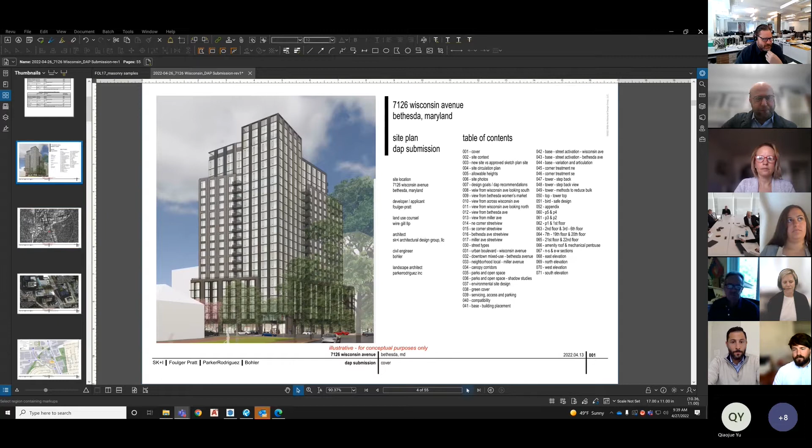Hi, I'm Andy Chakowski with SK&I Architects. As Judd said, we've been working on this for quite a while now, working through all the details as we've moved forward. Just to recap for those who may not know exactly where this is: we're on the south side of Bethesda, about 5 blocks south of the Metro Center, 2 blocks south of the new Purple Line station at the corner of Bethesda and Wisconsin, directly across from the Farm Women's Market.

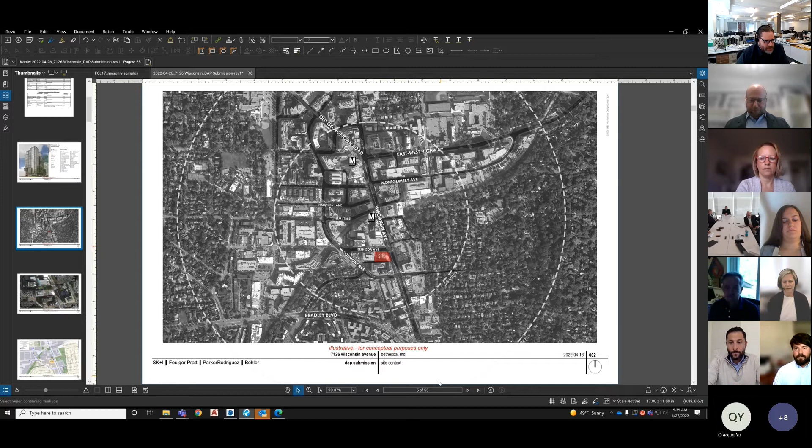As Heather said, this originally came in as a sketch plan and has an approved sketch plan for the eastern piece. We've now added the Capital One site and consolidated the site into a combined lot. This property line is important, as it extends up through the building and separates the heights. This is zoned to be 225 feet on the eastern portion, and it steps down to 200 feet on the western side of the building, and that broadcasts up through the massing.

I do want to point out, we submitted this two weeks ago to you all, and we just realized this sheet had a little error for those in the community—we had the older version of the Farm Women's Market. It's been updated since, and we've added that to the submission, so when it gets posted online, if any community members see that, this has the current site plan.

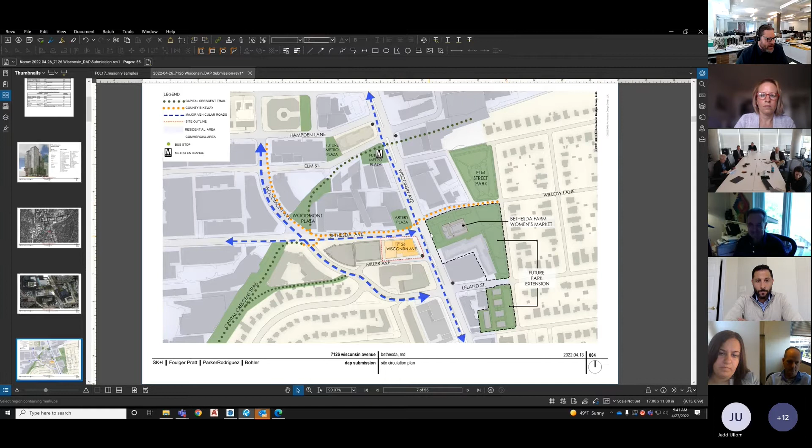This is just a circulation plan illustrating the major roads and the new bike routes. We know there's a bike lane that's been built on Bethesda Avenue, crossing Artery Plaza and extending across Wisconsin to the east, fully understanding the importance of this site and its place in Bethesda on Wisconsin.

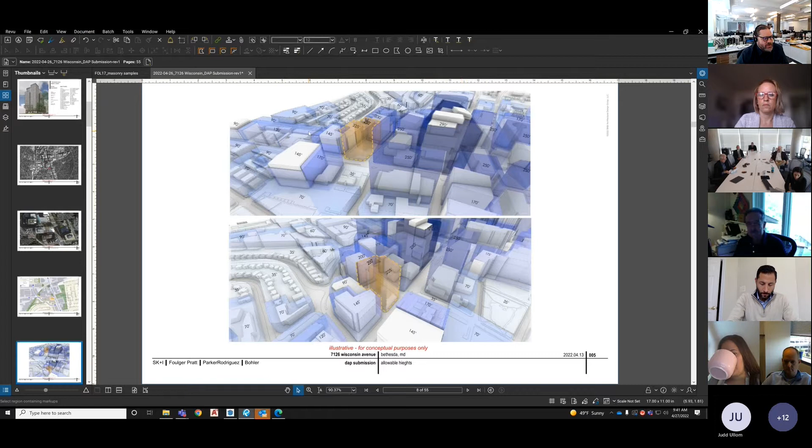Going back to the overall heights, the massing of the Bethesda plan tapers from the edges to the center, and we're one of the larger jumps in height—from 145 to 225, going up to the 290 of the Elm at the Purple Line station. Here are a couple of views showing that density terracing up, if you will.

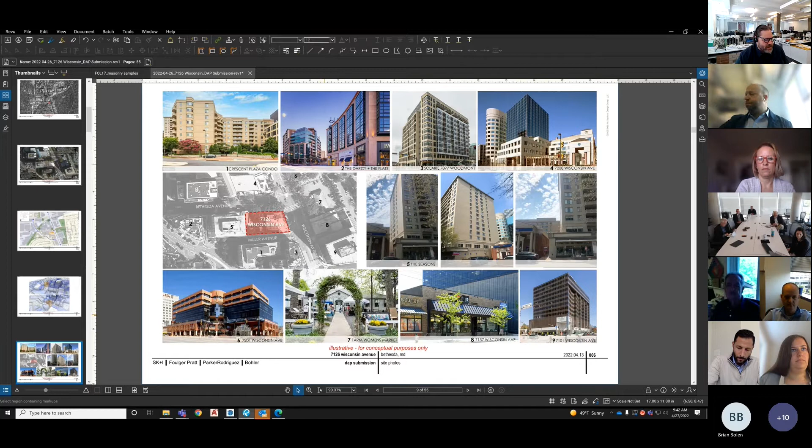Just a couple quick images of the neighborhood. There's a lot of existing condos, newer buildings built in the last decade or so. Artery Plaza is directly to the north of us with the brand new plaza and the new Starbucks—we commonly call this the Starbucks site. And of course the Farm Women's Market and the plaza around it to the east of us.

Just kind of recapping what we came in with. When we came in last July to meet with you all, we proposed the design goals of this project. We said this new expanded site now completes the urban block with 3 active frontages on Bethesda, Wisconsin, and Miller. Bethesda and Wisconsin being the primary ones, and Miller being a little bit more of a service road, but it will be vastly improved over its current condition.

We intend to achieve the design goals of the Bethesda plan and provide a dynamic, sustainable, and inclusive signature address at this location. Sculpt a signature residential tower while maintaining an approachable, scaled facade through unique geometry, varying tower heights, modulating and articulating facades, and limiting the facade's apparent mass, particularly due to the height, the 225-foot height. And create active and engaging architectural frontages and streetscapes to enhance the public realm at the ground floor.

These are the key recommendations we took away from our meeting last summer. One of the main ones was that the setbacks on Bethesda and Wisconsin could be enhanced. You all commented that the setbacks on Miller felt right, or they could be reduced to enhance the Bethesda and Wisconsin setbacks. You all recognized this corner tower on Wisconsin and Bethesda as a jamb, an urban doorway that connects Bethesda Row and the retail portions of Bethesda to Wisconsin and the Farm Women's Market.

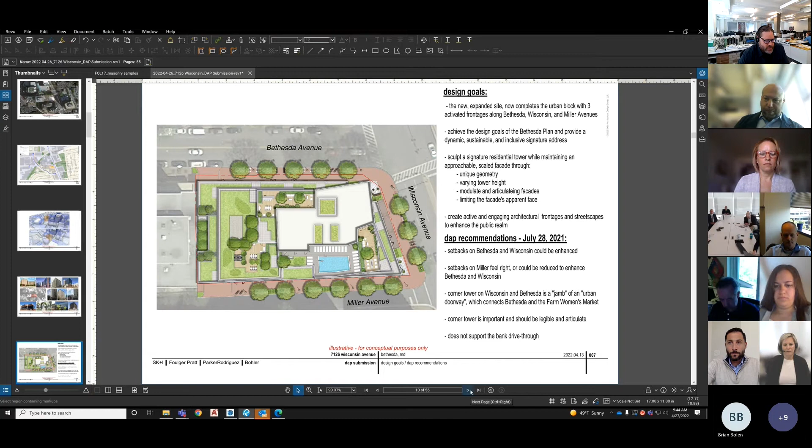One of the issues, I think Paul mentioned this earlier, and we really took it to heart, was the view. The master plan of Bethesda has a wide pedestrian promenade running along here, with the Farm Women's Market on the right side of the image, and the potential development on the left side, with a wide pedestrian promenade.

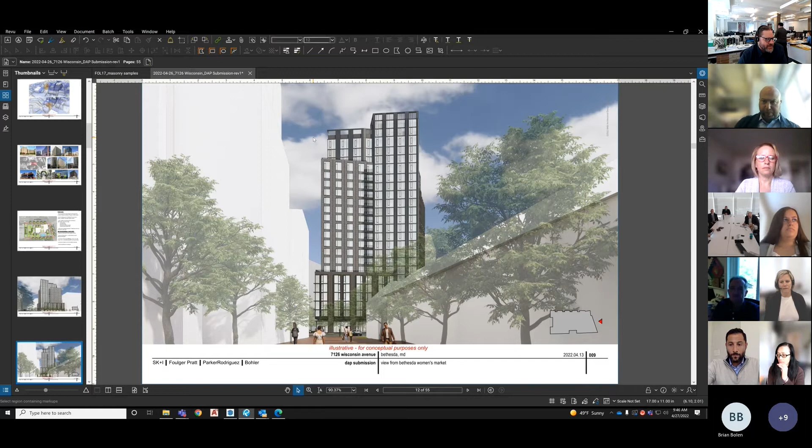We thought that this corner of the building, the secondary corner, was actually quite significant as well as the primary corner, and that this subtle tapering going back could be a quite elegant recess of the building as it splays going up the facade, taking pressure off of the street and fulfilling all the intentions of the Bethesda plan for these setbacks. This exemplifies that and creates a dynamic and interesting secondary corner to the property, which is on axis with that new pedestrian promenade.

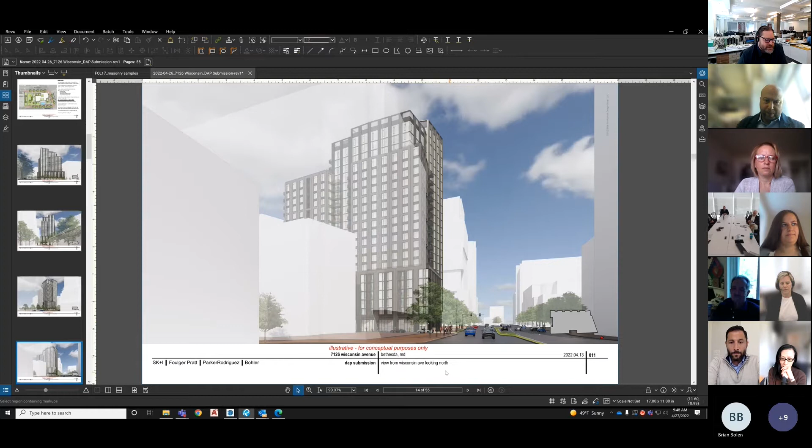This is another view looking north. We call this the True Foods building, since it has True Foods on the first floor. Again, you can see the tapering of the corner and the emphasis of the corner tower. But I think this building, with its placement on the block, the activation of the ground floor, and the tapering, its view, at least specifically from the south, is rather minimal, given the size and scale of the buildings going up along Wisconsin Avenue.

This is a view with the building on Artery Plaza removed, coming from Bethesda Row, near JBG's headquarters. You can see the activation of the base. We have our garage entrance here at the in-corner, and then the retail pieces stepping up the hill towards Wisconsin. The significance here is really that tapering down of the massing from the penthouse to the 225, to the 200.

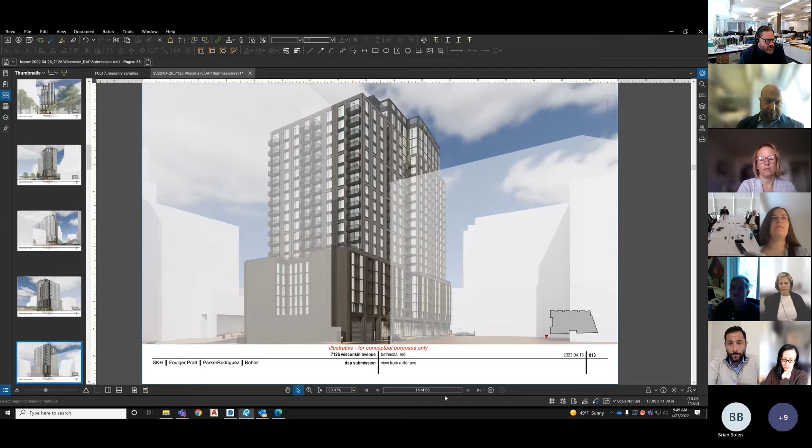This is another view on the south side, on Miller. You'll see this building from all sides. Even this may be the least significant view, but it's also visible specifically from Lot 31, the bike trail that connects to the Capital Crescent Trail. This is where we're proposing our loading, and we're also proposing a bike room on the back of the ground floor amenities, with quick access to the Capital Crescent Trail.

Moving back to Wisconsin, these are close-up views of the corner. We've extended this to be a two-story volume on the corner of Wisconsin and Bethesda. You see the retail storefronts going down Wisconsin and down Bethesda Avenue, with the corner tower coming down. We've treated this corner tower with articulated fins that extend all the way up to the top of the building, specifically at this corner. We're proposing a rich, dark, iron spot brick for the base of the building, punctuated with bays and balconies in metal frames that wrap and surround the window frames, creating a layering effect on the facade.

This is again the south corner, showing the lobby entrance, the main entrance to the residential building. We've preserved the Bethesda and Wisconsin corner for retail, and shifted the lobby to this corner, which still gives it a Wisconsin Avenue address. The Miller side of the facade on the ground floor will be the lobby, amenity, and leasing areas, and further back towards the loading dock we'll have the bike room, dressed up in a special way to make it feel special and quasi-public.

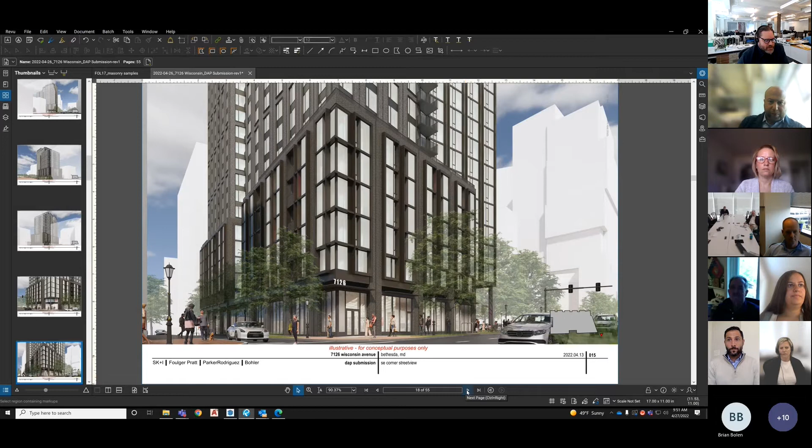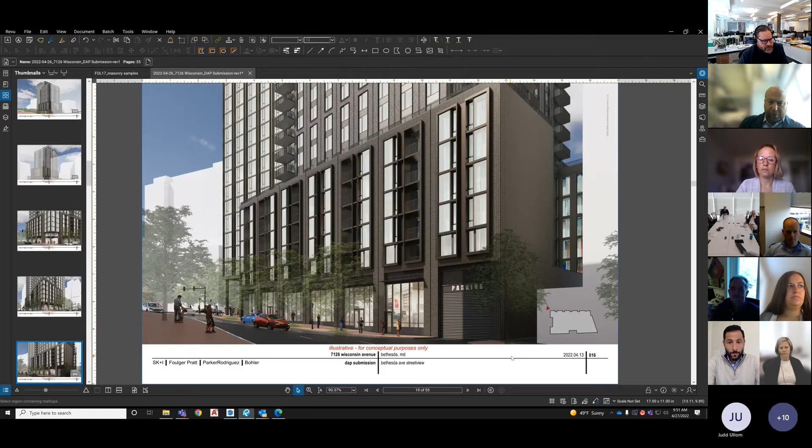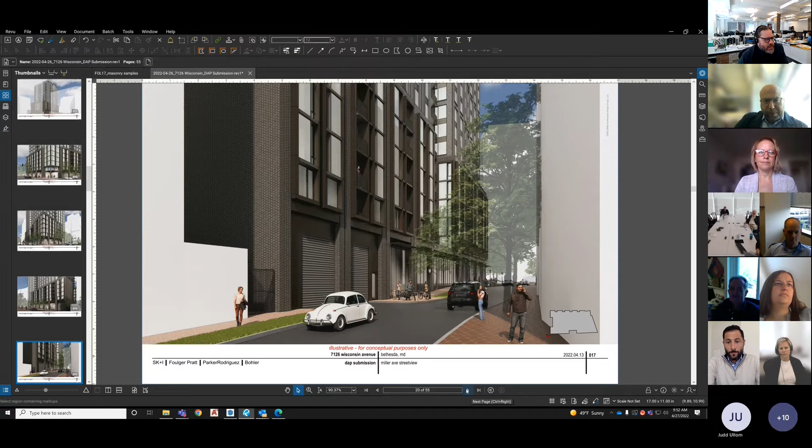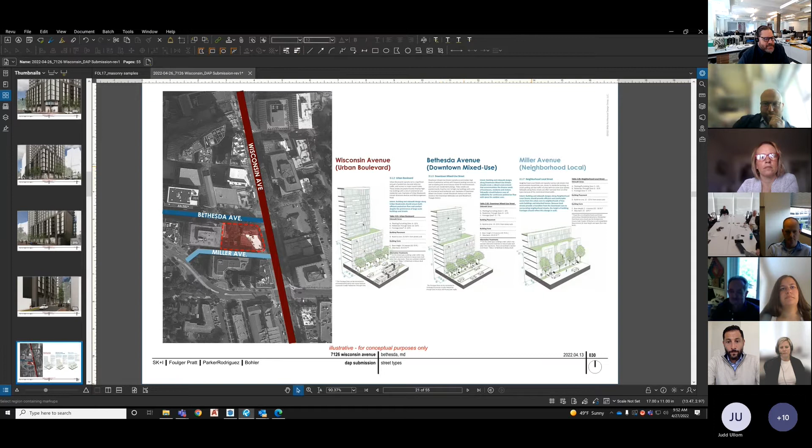We put a lot of diagrams into this to make it abundantly clear that we understand the Bethesda plan and the design guidelines, and that these all influence the building design in impactful ways. Having three frontages, each one of these streets has a different street type in the design guidelines: Wisconsin, the Urban Boulevard; Bethesda, Downtown Mixed Use; and Miller, the Neighborhood Local. Each has different impacts on the facade, the setbacks, and the streetscape.

So we'll start with Wisconsin. We obviously understand the building frontage, and going up through the terracing — this relates to a specific comment from the previous DAP last year, where you all said that the setbacks on Wisconsin and Bethesda were timid and could be enhanced. I think this is where we really took it. We knew Wisconsin was the primary facade, and we enhanced this one as best as we could, starting with a 10-foot setback after the podium.

We went up to a 13-foot setback at the top, and we really pushed this back to about 21 and a half feet at the corner here. So we've really splayed this as it goes up and tapered it back for all the reasons that we talked about.

But I think it really makes a dynamic and interesting secondary corner for this property, as well as meeting and enhancing the intentions of the setback guidelines. On Bethesda, we ultimately get to the 10-foot, but we start at the corner, we taper back to 10 feet. The notch is 10 feet up. The top is 10 feet. But, how do I put it? We can talk about this in the discussion.

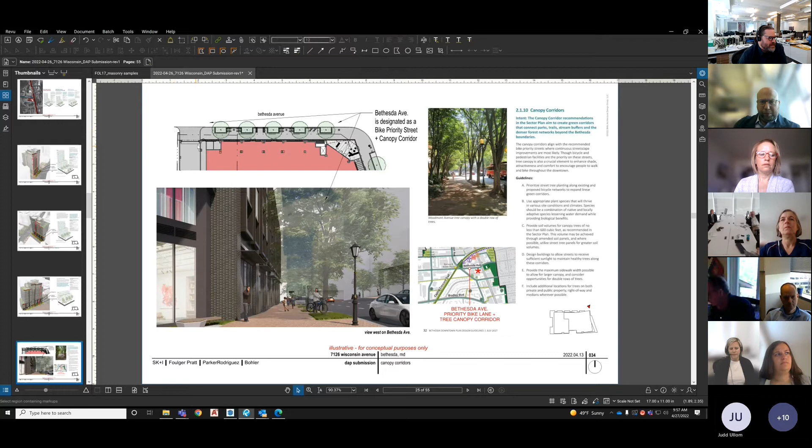A few more diagrams, just reading through the Bethesda guidelines. We understand the importance of the Canopy Corridors. Bethesda Avenue is considered a Canopy Corridor, so we'll be rebuilding it. There are some lovely trees there, but the sidewalks are incredibly narrow, and it's a very precarious place to walk right now. So this will be widened significantly, and we'll be replacing it with 5 substantial street trees moving forward, only interrupted by the small 20-foot drive aisle at the western end of the property.

Going back and understanding the context, we preemptively put this in here, just knowing it could become an issue, but understanding the impact and significance of the farm women's market and all the park space that'll be planned and designed around it.

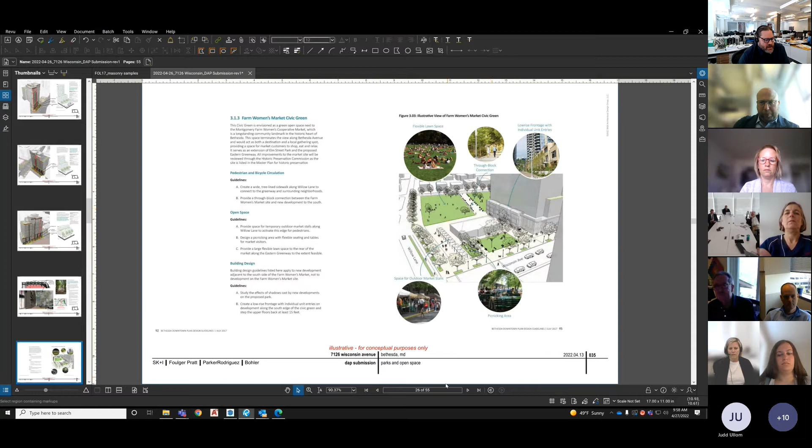We wanted to illustrate the cardinal seasons, the equinoxes and the solstice from spring through fall, showing the impact of the shadow studies and how through the majority of the day, this building will not impact the park at all during the prime use hours from 9 till 3 in the afternoon. I think this was important because we know community members might be concerned about the impact of this building, and it's minimal during these dates.

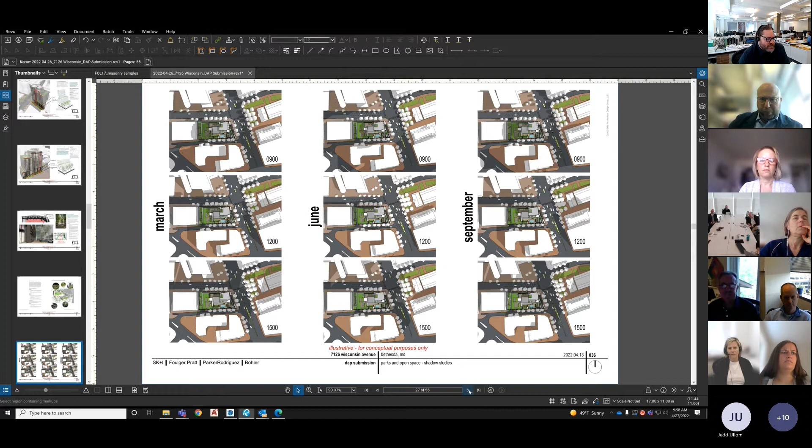Going into the environmental site design of the building, Valerie and Brian worked tremendously hard on meeting this, but we're really pushing the rooftops of these buildings. The rooftops are becoming the most complicated parts of the buildings in some extent, but through designing the vegetated roofs and then the bioretention.

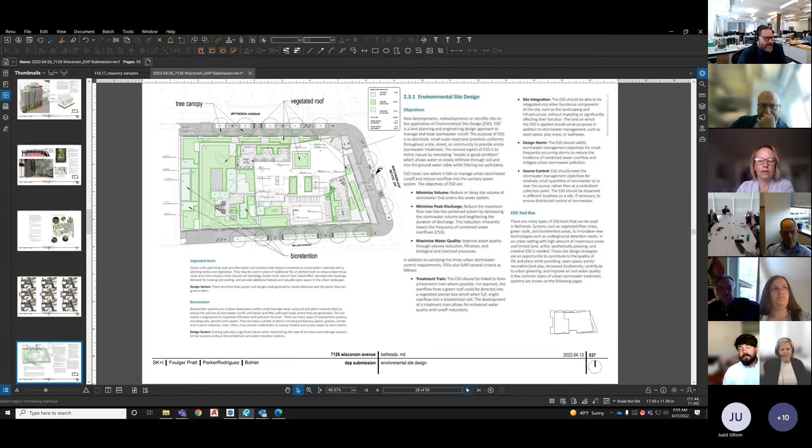This is a diagram that Parker Rodriguez came up with to provide the amount of bioretention, tree canopy, and vegetated roof to not only meet these environmental water retention standards, but also to meet the green coverage of 35%. We'll get into this later, but Brian and Valerie can speak to this in tremendous detail.

Going back to service, access, and parking, this top corner diagram shows what's currently there: a lot of head-in parking, a lot of curb cuts. There are some nice mature trees, but also a lot of unusable, pedestrian-unfriendly paths. We'll be cleaning all that up on Bethesda with only a singular garage entrance, and on Miller, where we're providing a lot of new tree canopy that currently has nothing but head-in parking. We'll provide loading on the back corner, along with the bike room and service areas for residents in that corner. I think the curb cut condition has really been enhanced by this new development.

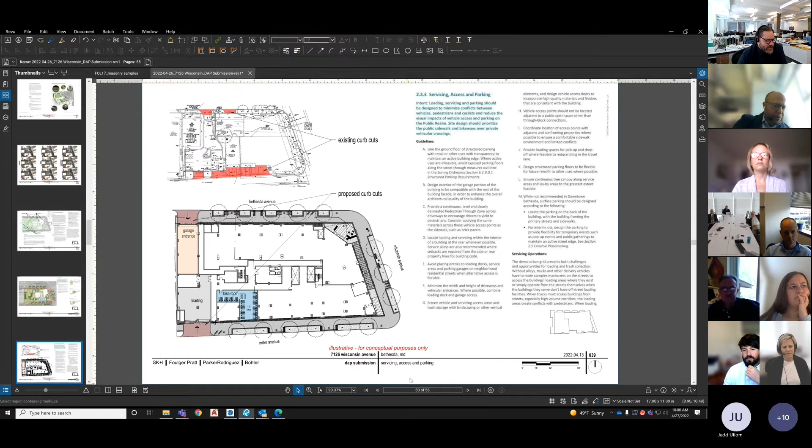Referencing back to compatibility, as I mentioned at the beginning, there's a cascading effect. The base is 6 stories, the body of the building is 19 stories and runs all the way around from Bethesda to Wisconsin and then down Miller. The top of the building is 22 stories, only in the portion I referenced earlier, due to the property lines that impact those height designations between 225 and 220. So it's only this corner bit that's 22 stories, and the corner tower serves as the doorway, the landmark.

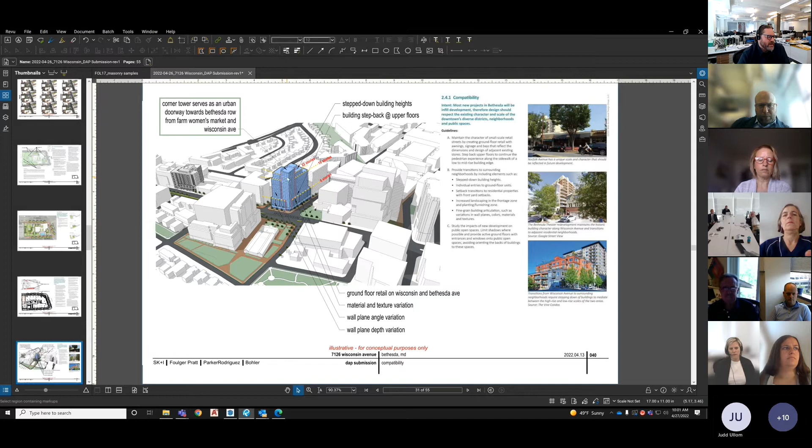We are proposing to put all the mechanical equipment on top of the penthouse, and we'll have the club room in that corner on the top floor, which is allowed, with access to the rooftop pool, et cetera.

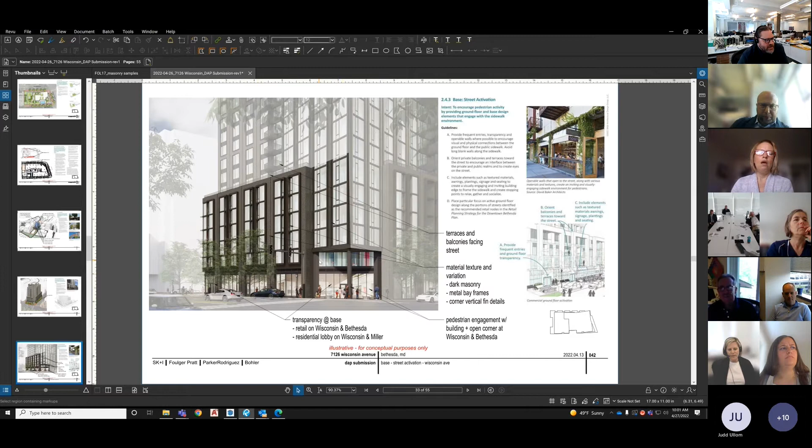A few more things going through the base placement. We followed all the design guidelines to locate and place the building, which provides all this wonderful streetscape. The base street activation is incredibly important, specifically on Wisconsin, with the lobby, ground floor retail, carving the corner, the 2-story corner, and then turning the corner and running down Bethesda Avenue. That's referenced here in this design guideline as a recommended retail node, and this is one of them, so we're complying by providing ground floor retail specifically at those recommended corners and frontages.

Just diagramming the base, variation, and articulation. Going back to these diagrams, you have the corner tower, the 2-story void at the corner, then stepping up to the 6-story. It's not a tremendously long facade at this point, running cleaner along, but then adding those bays, the bay windows and bay projections, the bay frames that hold the balconies within them. Those frames bounce along, creating shadow and visual interest along Bethesda and Wisconsin, as well as Miller, though we didn't diagram that here. And then there's that consistent storefront line.

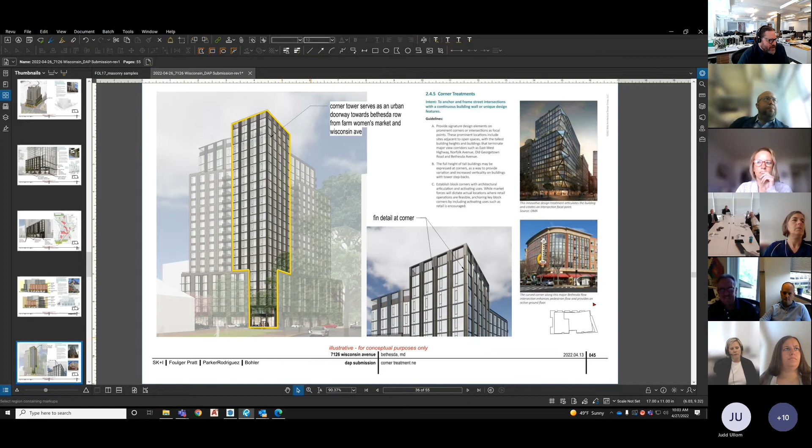Corner treatment, again, thinking of this as the urban hinge, the doorway to Bethesda Row from the Farm Women's Market. The significance of this corner, having it grounded and extending all the way up, then adding detail and articulation to it. We're proposing vertical fins that rise up and attach to the facade to give it an extra layer of detail, an extra layer of shadow play.

The corner treatment, again, that secondary corner discussed earlier, the tapering of that facade along the promenade by the Farm Women's Market. And then the tower setback - we showed this diagram to really illustrate how we're meeting these tower step backs. The minimums recommended are 10 feet on Bethesda, 10 feet on Wisconsin, and 15 feet on Miller. Miller is a little less significant in terms of meeting those, but it does meet that intention through the cumulative setback, the setback averaging if you will, from one property line to the other, providing that significant gap in the middle.

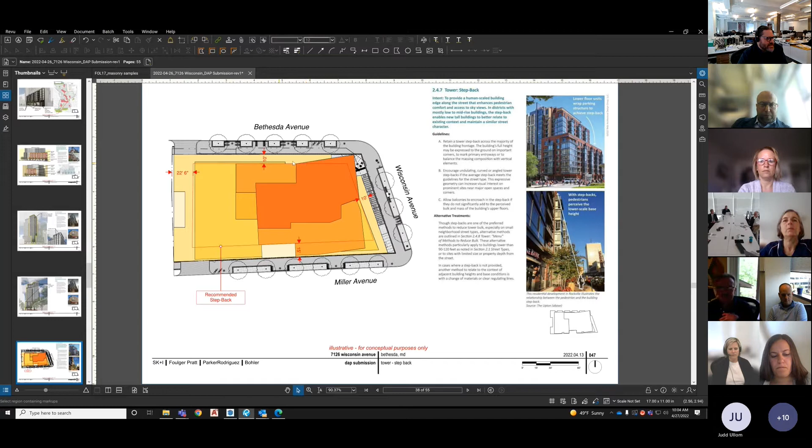It's sort of a heat map of the roof plan as it terraces and cascades up, and it is quite sophisticated. There's a lot of setbacks, a lot of terracing, a lot of structural things we've had to work through to meet this, but we think it works - it's very compelling. It meets the corner and then steps back. The enhancements we've really produced are on Wisconsin - we had this splayed, and we've cranked it back so it's a consistent 10 feet at the upper levels.

And then those setbacks all play into this visual diagram of cascading up the building to meet those setbacks. And the majority of the frontage is setback.

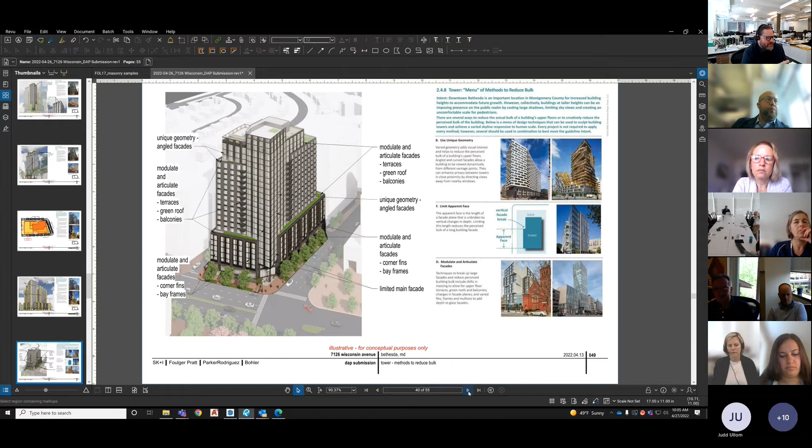And then again, the menu of items that we talked about: using unique geometry, limiting the tower face, and then modulating and articulating the facades. I think we've worked diligently to meet all of these criteria.

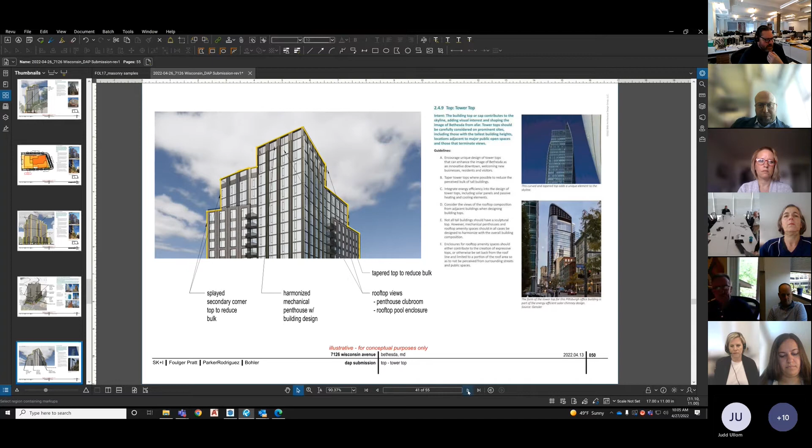And then the tower top, allowing this tower top to extend up, providing the club room and amenity spaces on the penthouse level, and then extending that up to hide and screen all the mechanical equipment that will be heating and cooling this building, and providing views for the residents on the terrace.

And then understanding the bird safe design issues, through the articulation, through the projecting balconies, through the window depth variation and material depth variation, adding the fins, adding the shadows. The body of the building, the wings are masonry, and having those windows set back within that.

And I think the bird safe design has kind of been evolving about what and how these things happen. We're hearing a little bit more feedback that a lot of this is happening in the bottom 35 feet of the building, and I think a lot of what we're proposing with these bays and bay frames and extensions at the bay windows will really play into that as well.

And that is it. We have floor plans for reference, building facades, building sections beyond the appendix. So thanks for bearing with me. We wanted to make sure that we were thorough in meeting all of the design criteria laid out in the design guidelines.

So with that, I guess we can start discussion.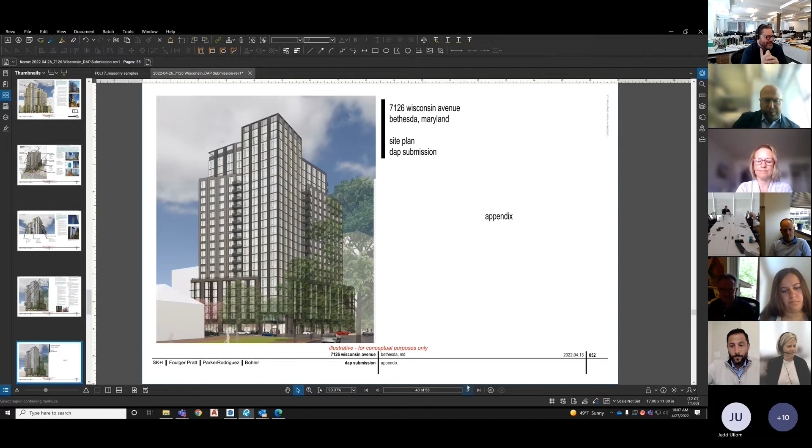I want to jump in and apologize. This is Brian Kelly. I was having some connectivity issues here, and I came in late. So if we're taking a vote, I'm going to abstain from voting. But I just wanted to jump in and say that this looks like great improvement, great progress from the first round. Two quick comments.

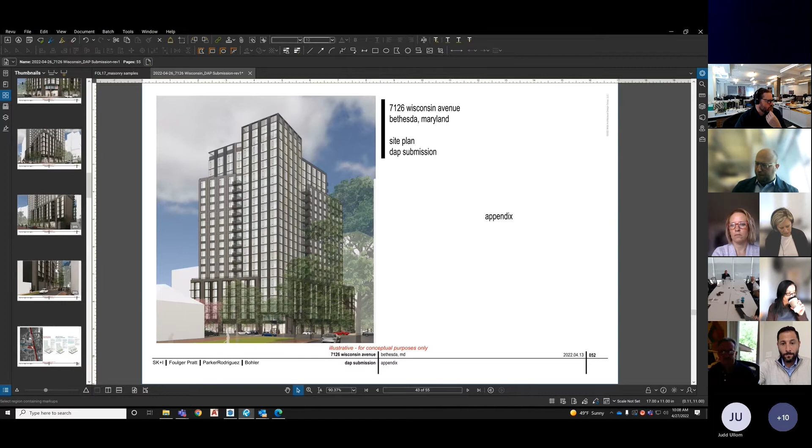One is the tower element we're looking at right now in the oblique. I think you have a unique opportunity at the corner with the way that column comes down. The column seems to belong to the order of the rest of the building, and it seems to me, thinking about a lot of Art Deco buildings that express a corner in a similar way, that column element could be a flourish—something not necessarily part of the same palette of material, not the same charcoal color, but something that celebrates, maybe a bit more hefty. Visually, it looks like it's pulling down a load from the top of the building all the way down to the base, so there's an opportunity to create that moment as a kind of flourish and signature part for that part of the building.

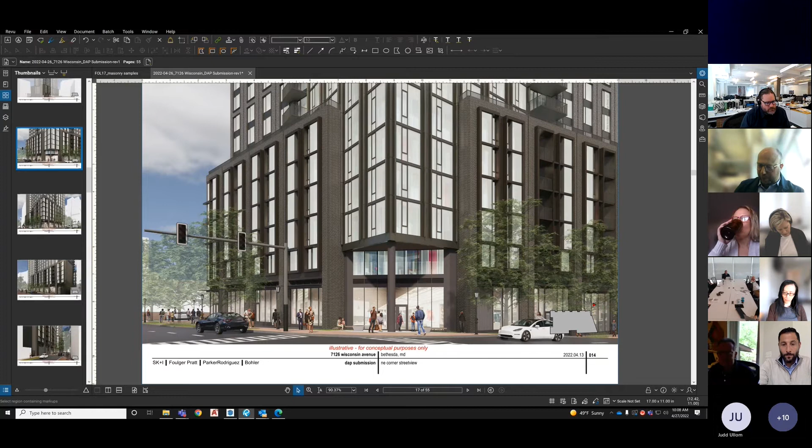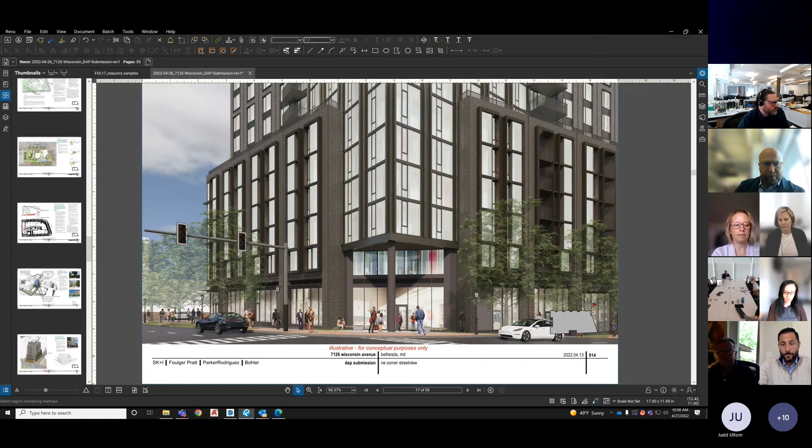The other thing that struck me is the very top of the tower. I know there was a public comment about making the tower higher, and I don't know if that's practical. But the amenity room and the windscreen above it read as two separate things. I'm not arguing for truth in facade here, more artifice and facade. I wonder if the spandrel between the windscreen and the amenity room glazing could be downplayed so you could get a bigger reading at the top of that building—something that caps it off a bit more, so it's a kind of giant order giving the tower piece a flourish at the top as well.

So the middle is great—how it grounds and then how it flourishes at the top. I think simply suppressing the spandrel, painting it out, downplaying it—since it's the same spandrel we see elsewhere in the building—making that spandrel a little more suppressed might allow that whole top bay, the windscreen and the amenity room, to come together and create a bigger scale at the top.

And I'll be quiet after that. Sorry about that, I have some questions.

I didn't hear much about the materiality above the 6 stories, where you got the dark brick on the base of the building, but the fins appear to be dark. Is it all metal and glass facade above that point, or are there other materials?

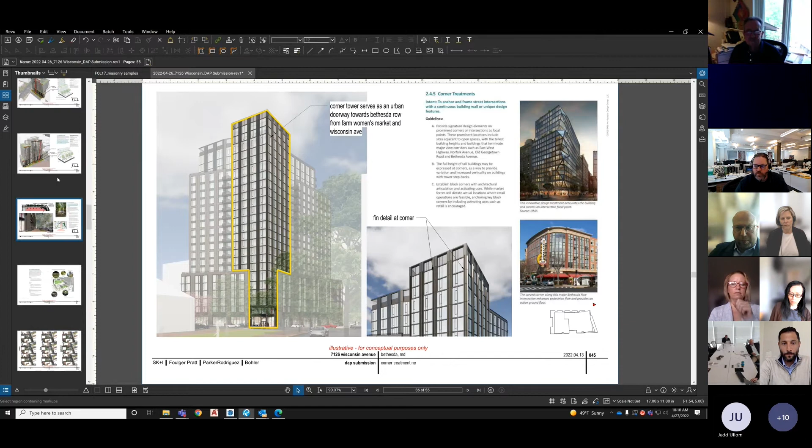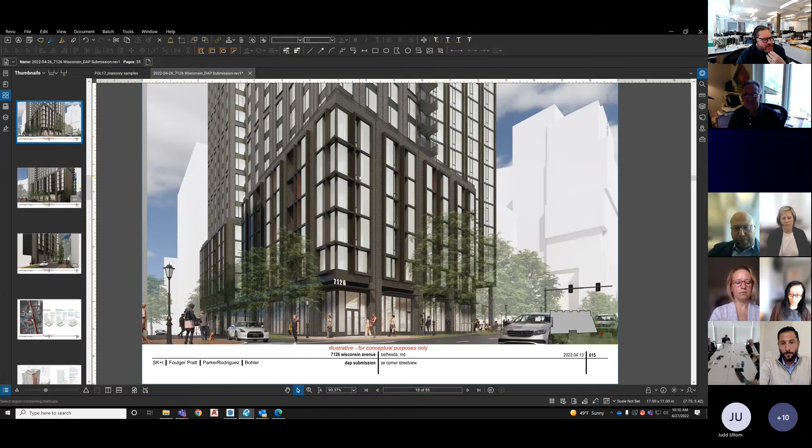Yeah, let me find an image I can zoom in on. I think what we're looking at is wanting to do a tone on tone in terms of the masonry. The majority of the building will be masonry, and we're looking at doing a darker base brick, then a tone on tone to have a lighter but still dark brick at the tower, with that change in tone, maybe even a change in texture, or a change in the scale of the brick, transitioning up as it goes.

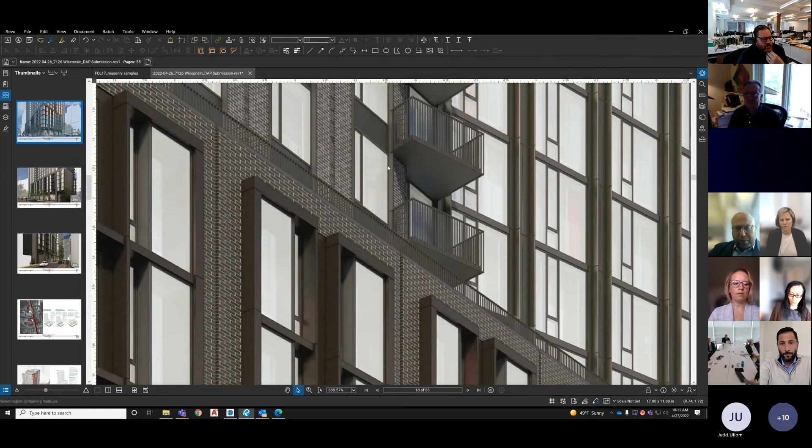The corner tower is metal, glass and metal panel. So we're proposing metal panel at the corner.

And I think, Brian, those are really good comments, because we got to a point where we knew we needed to develop those further, but a lot of the mechanical equipment at the roof is still coming into focus. The corner we got to a point we were comfortable with the overall design and scale, but we knew it was going to be an issue, and we wanted your feedback, to be perfectly honest. We do agree with you, it's an opportunity to embellish that bottom corner.

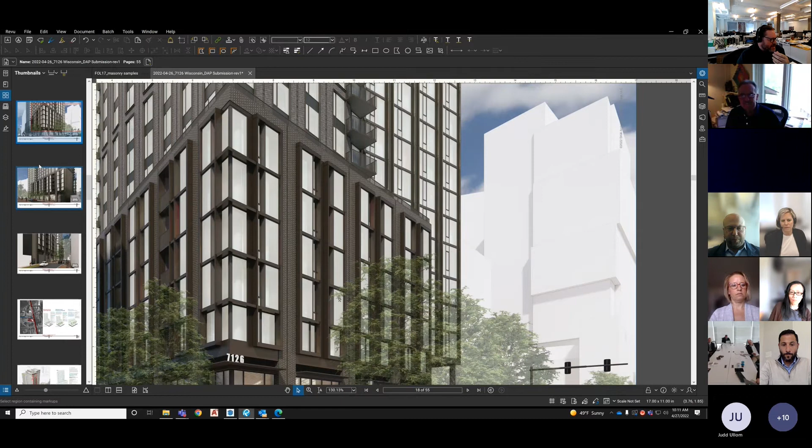But to answer George's question, yeah, it's mostly masonry, with the corner pieces being metal, the penthouse being metal, and the spandrel panels being metal.

Do you think the tower coloration will be lighter than the rest of the building? Yeah, well, we anticipate the body of the building as it goes up to be like a tone lighter, 1 or 2 tones lighter. I kind of threw this together.

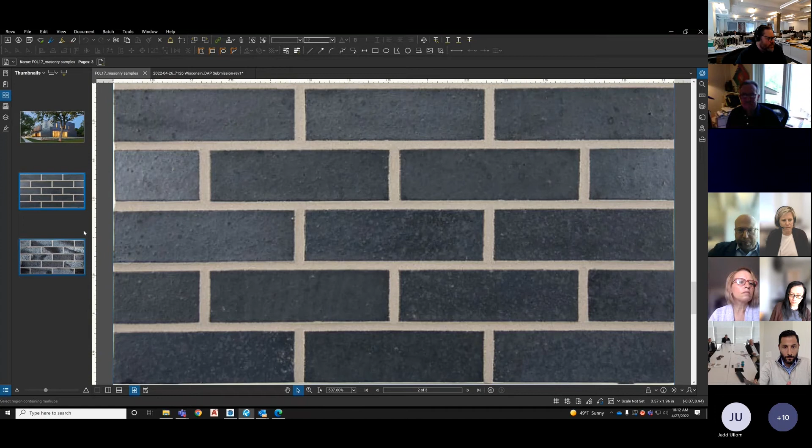Everyone's familiar with these dark, rich iron spot bricks, but the base could be a really rich, maybe smooth or textured brick, with some new shades as you go up. That could have a lighter, more playful brick at the base, and then a more textured, rangy brick at the tower to create that light play, the color play. These bricks dapple in the sunlight, and they change color quite a bit too, which is quite fantastic.

That was one of the thoughts here, to have maybe a more polished, rich brick at the base, and then a more playful, rangy brick at the tower to give it a little more range and dapple effect as it goes up.

Got it. Well, George, this is Judd. I think we agree. I think having slightly lighter tonality of gray on the middle panel portion, so there's kind of a trio of these different grays that interplay together. We were conscious that while this is a tall building, the site's not that large in actuality, so I think we like the idea of playing with the tonality, but not deviating into a variety of colors — it just got too busy.

Well, I think I agree with what Brian was saying. I think the massing has come along very, very well. I'm trying to get my head around the masonry context all the way through. But one thing I did want to mention — I mentioned it on the Marriott headquarters too — I think the tower, while it's very elegant the way it's shown, it sort of...

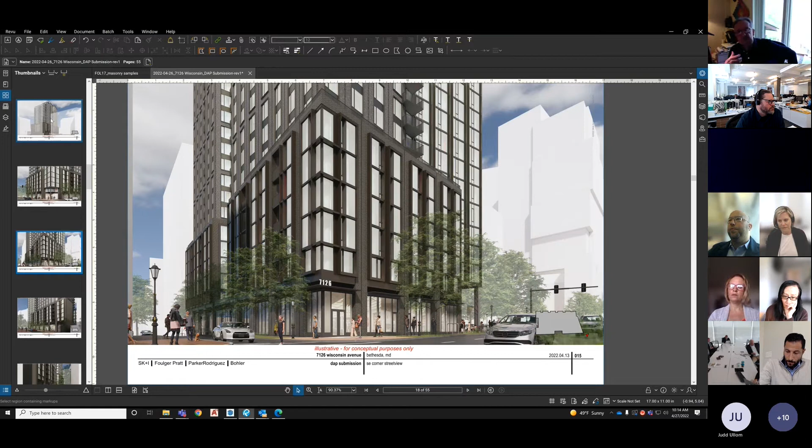...poops out at the top, and probably could be — since it's a main vertical feature of the building — the way it ends could really be an opportunity for something exciting to set this tower apart from others. Since you have the fins going up anyway to the top of the tower, maybe there's an opportunity to extend them up or something. I'm not going to tell you what to do, but it just seems to me, I think Brian said that it sort of just stops at this point.

And in the Marriott, they added the slope, which is one of the things we talked about at that time, and I think that's one way to do it. I'm not sure that's appropriate here, but of everything on the building, I think that's the one thing that could perhaps have a little bit more interest.

Yeah, that's fair. If I could jump in, I guess you guys can hear me.

I agree generally with all the comments that I've heard. I think there's been significant improvement in this design as we've seen it over the years. The things I really like about the project: I really like the base of the building, I really like the intent of the fenestration pattern of the hinge, and I very much agree with the top of the tower at the hinge.

Instead of being truncated, it needs to be terminated. I don't know that it needs to be overplayed, but right now it just feels like it's been cut off.

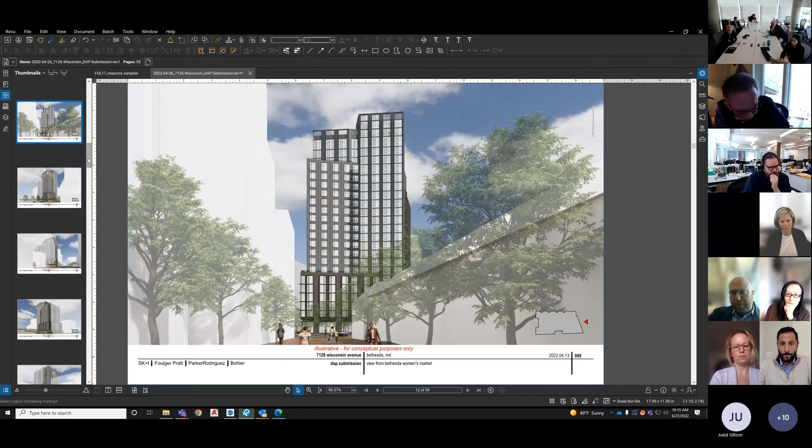I think my bigger reservation is really about the scale of the hinge itself, particularly on the north side. It's really apparent when you look at the perspective heading down Wisconsin Avenue and you see the building. It's interesting how wide it is — on the north side, let's call it 5 window units wide, versus on the east side it's 4 units wide.

You almost wish there was some way — if you go back to the north facade again — you could overlap that skin to the right over the hinge itself and decrease the width of it to get a better, more elegant proportion. It seems to be really in your face when you're coming south, driving south on Wisconsin Avenue into Bethesda.

That's an interesting comment.

Thinking it through, I think it's a couple of things. It's based a little bit on the floor plan layout, as well as the extents of the tower top and the penthouse, the amenities, and the location of the elevators, so that you can come out of the elevators and meet that. So in some ways it's been plan-driven to a certain extent.

To a certain degree, I'm not necessarily saying diminish the width of that tower element — more talking about trying to pull that east portion over, have it overlap to a certain degree, and allow it to extend to the 5 bays, 5 window units wide as it emerges above that overlap. What happens at the top of the tower ultimately might have an impact on that — mitigate some of the issues along the way.

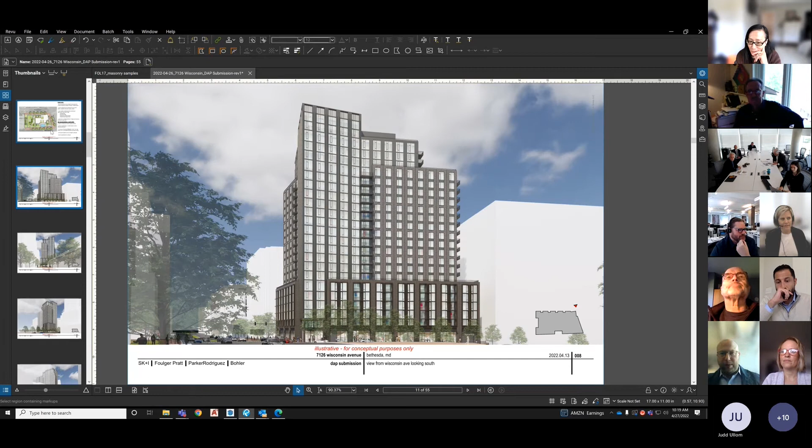This is Chao. I agree with all the panelists' comments. I think the massing has a lot of improvement.

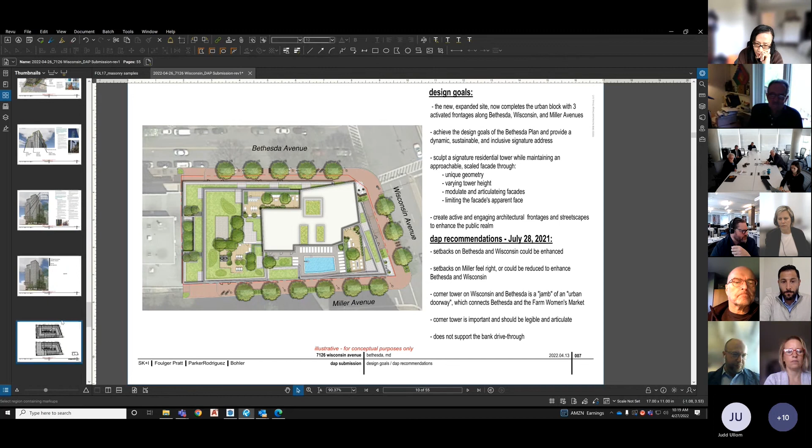I do have a question regarding the ground floor. Could the design team explain what is happening on the ground floor behind the property line — the programming, and what the outdoor spaces are for? Yeah, sure. So essentially, this is the ground floor.

On the Miller corner, we're proposing the lobby amenity address. You come in at the corner with lobby leasing and elevator access. We have the fire control panel, fire control room, and then retail.

Running along the primary corner and turning down Bethesda, we have a lot of our transformers located on Wisconsin. It's a wide enough walkway to create tree pits and the pedestrian promenade, and these additional lines are the transformer locations. We've been studying this quite a bit—it's happening from Marriott to the new Trader Joe's. It's working out quite well, Pepco wants to put all these things on Wisconsin, and the setback is gracious enough to accommodate all of this while turning the corner and providing enhanced streetscape.

We don't know exactly who's going to be leasing here, but we're trying to be as flexible as possible. There is a grade change, so we anticipate slab folds on Bethesda Avenue. We don't know exactly where they'll be yet, but we're showing multiple entry locations for a handful of retailers—there could be 2 or 3 different retailers here potentially.

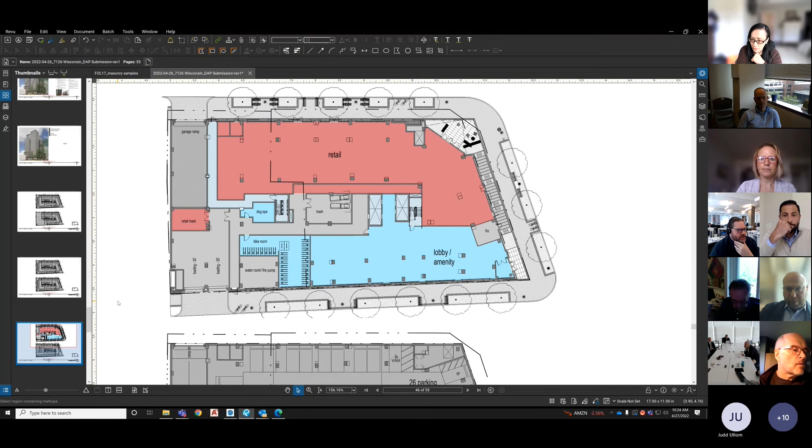There's an Artery Plaza across the street on the north. Is there a timeline for that plaza? It's done now. Yeah, it's really nice. And these will open up to it, so it's kind of nice.

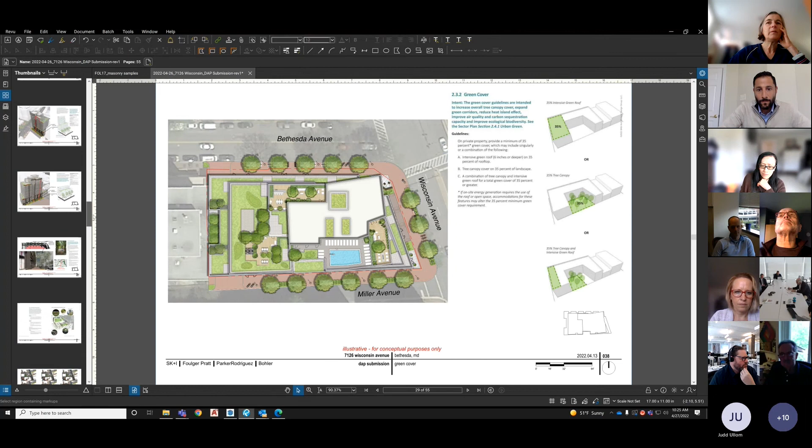I'm sorry, I missed that—what's the plaza you're referring to? It's the Artery Plaza. Oh, okay, directly north across Bethesda Avenue.

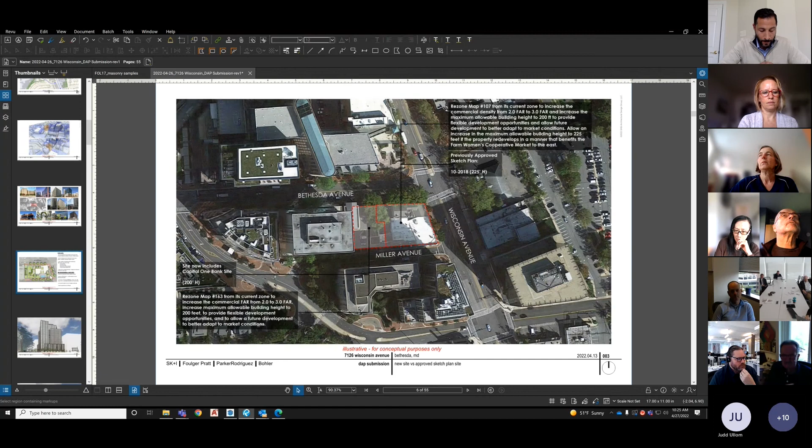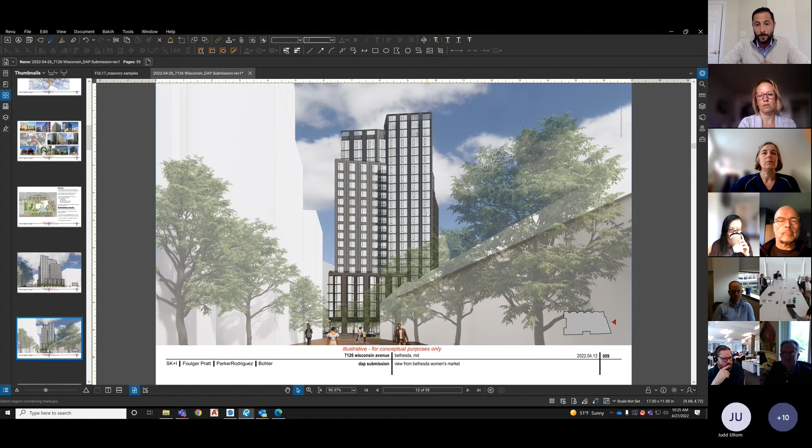I'll chime in—I very much like this project. I think you guys have come a long way from the last time you showed us the conceptual design. I certainly understand my colleagues' comments, and there's always room for improvement, but I really like this building. I'm not sure if you're asking for a vote today or planning to come back, but I'm ready to vote for approval right now. I think this is a really nice looking building, and the system of step backs really works well on this project.

What are we doing today, staff? I know Heather mentioned they were going to be coming back when they submit their applications in the next coming months, but if the panel doesn't have to...

I was just offering. If the panel's ready to vote today, based on the previous times you've been here and the fact that you are going to be submitting soon for sketch, preliminary, and site plan, I think if the panel's ready to vote today, we're happy to take the vote and not come back.

And I realize that the sketch plan amendment, preliminary plan, and site plan aren't formally pending before you now. But we're certainly happy to give the DAP a courtesy submission copy of that when we file, or even just do a quick courtesy stop by. We appreciate your willingness to vote today and your recognition of how hard the team has been working for a long time now.

And I think the applicant's requesting 10 points for design excellence. Yeah, that's correct. So like I said, I'm okay with voting. I'll leave that decision to planning staff and my colleagues. But like I said, I'm comfortable today with where it's at, especially for 10 points.